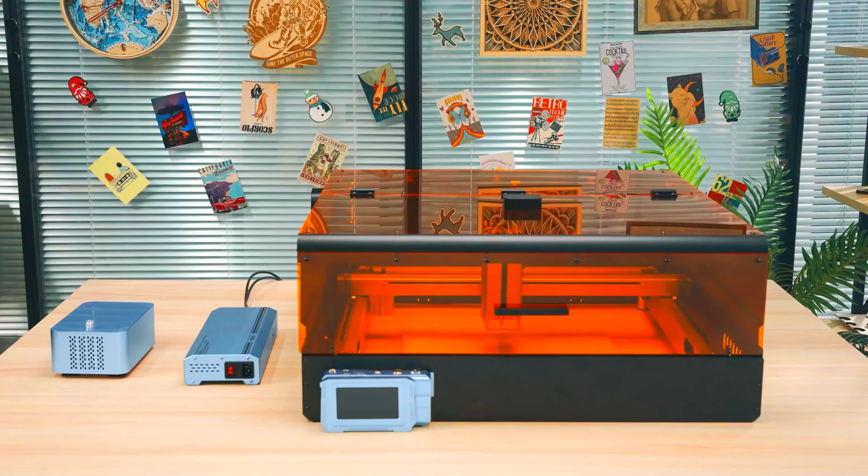Today we are diving into the world of laser cutting and engraving with the IKIER K1 Pro Max 70W, a powerhouse machine that promises to revolutionize your crafting game. I will also be introducing the IKIER E2 enclosure with an HD camera. First, let me show you this machine in action, then we will dive into the technical features.

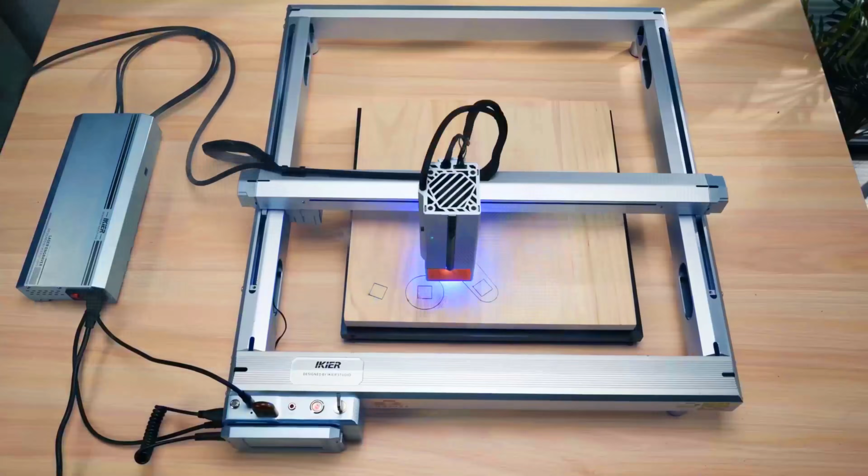Ever had a project interrupted by a power outage? Say goodbye to wasted material and time with the IKIER K1 Pro Max Resume Engraving feature. It's the world's first laser engraving machine to seamlessly pick up where it left off, ensuring your creations remain uninterrupted.

But wait, there is more. The intelligent Z-axis elevates this machine to new heights of user-friendliness. With electric and manual adjustment capabilities, achieving precision has never been easier.

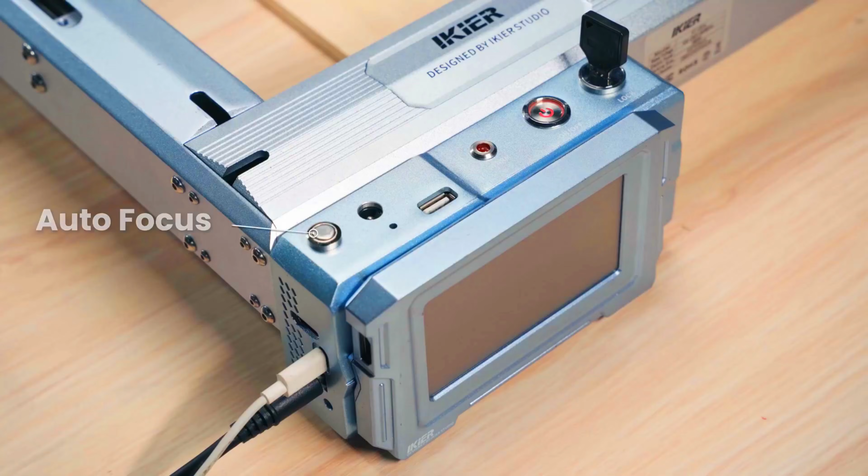Speaking of precision, the one-click high-speed autofocus function is a game changer. With just a press of a button, the laser hones in on its target in a mere 8 seconds, making your engraving process a breeze.

Thanks to IKIER's proprietary motherboard and optimized algorithms, sinking cutting is now a reality. By controlling the automatic descent of the laser, cutting depth is increased by a staggering 30 to 50%, offering unparalleled versatility.

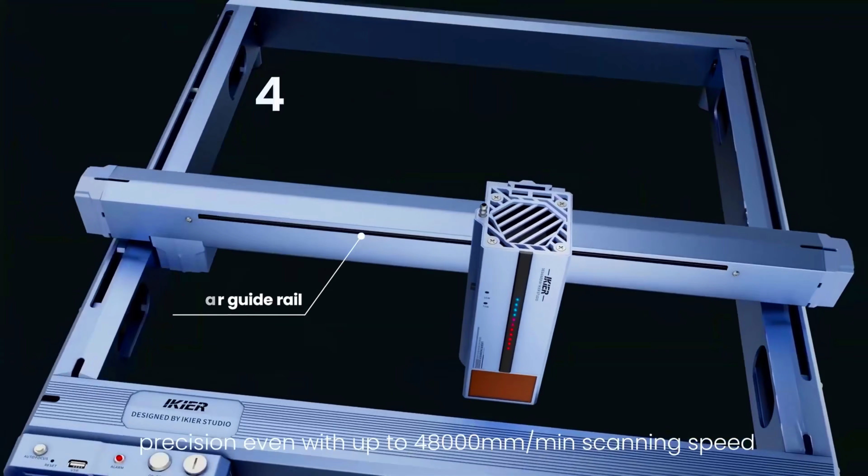At 800 mm per second, the IKIER K1 Pro Max is in a league of its own when it comes to speed. Combined with its precision, this machine delivers flawless results at breakneck speeds, saving you valuable time without compromising quality.

Precision is the name of the game here. With cutting capabilities surpassing those of 40-watt machines by 90 to 100%, the IKIER K1 Pro Max can slice through materials like plywood with ease, rivaling the power of much larger CO2 lasers.

Thanks to its ultra-fine focus, the IKIER K1 Pro Max can handle a wide range of materials from wood to stainless steel with unmatched precision. Its upgraded technology ensures clean cuts even through the toughest materials.

Durability meets convenience with the IKIER K1 Pro Max's robust structure. With a modular design and quick installation process, you will spend less time setting up and more time creating.

No PC? No problem. With its intelligent offline controller, the IKIER K1 Pro Max lets you engrave without being tethered to a computer, giving you the freedom to create wherever inspiration strikes.

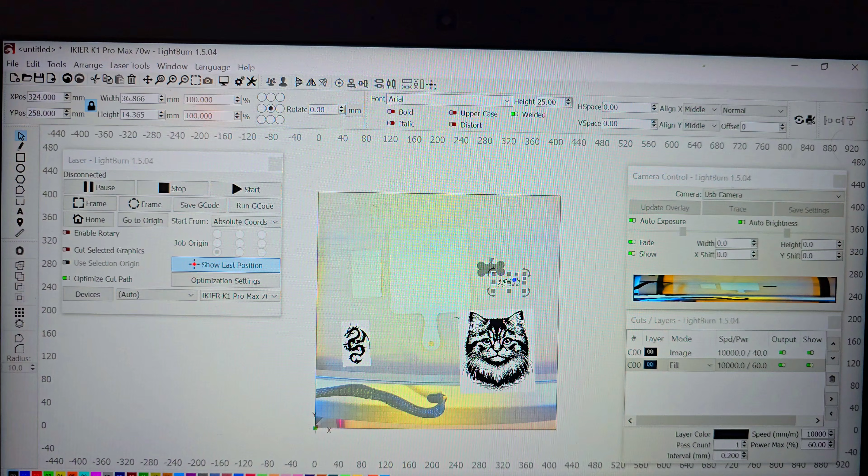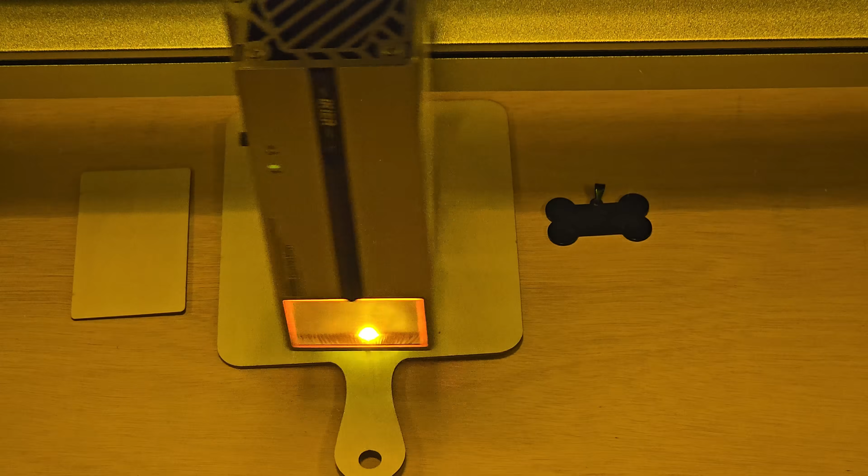Now, let's introduce the IKIER E2 Laser Engraver Enclosure, the ultimate companion for your laser engraving endeavors. Crafted specifically for Class 4 laser engravers and cutters, this enclosure is designed to provide a safe and comfortable working environment. With its robust metal and acrylic body coupled with a powerful ventilation system, the E2 ensures compliance with Class 1 laser standards, keeping safety at the forefront of your operations.

Boasting outstanding smoke exhaust efficiency driven by a 7,500 RPM exhaust fan, this enclosure ensures that smoke disappears without a trace, while isolating 99% of dust, particles, odors, and noise.

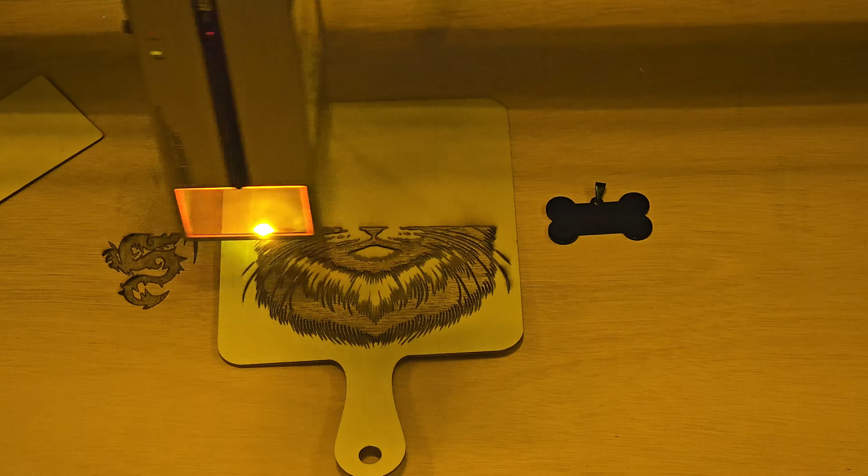Its innovative features, such as enclosure opening detection for seamless workflow management, a fire smoke-resistant metal frame, and an HD camera with visual precise positioning, make batch processing a breeze. Simple assembly, LED lighting, and a laser shield further enhance the user experience.

Say hello to a new era of precision and safety with the IKIER E2 Laser Engraver Enclosure.

And there you have it, folks, the IKIER K1 Pro Max 70 watt, a true game changer in the world of laser engraving. With its unparalleled speed, precision, and versatility, it's time to take your crafting to new heights.